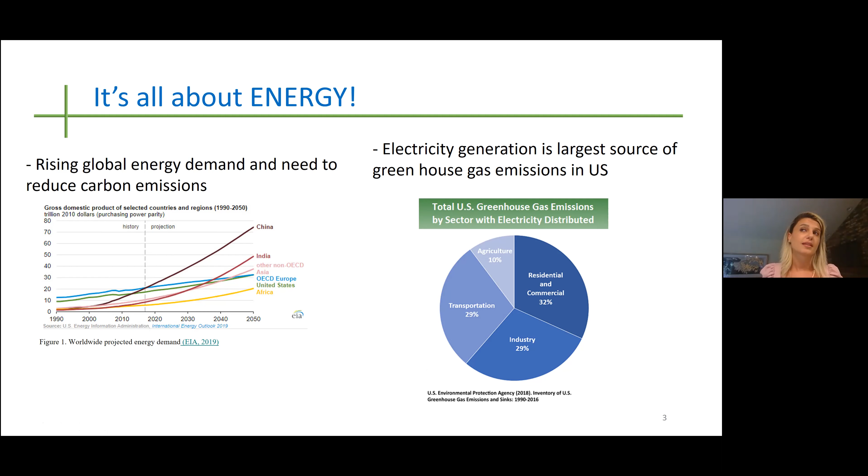If you take a closer look at this figure, residential and commercial buildings are responsible for 32% of the electricity usage in the country. This was taken from the U.S. Environmental Protection Agency, reported in 2018. This number has increased since then; in the updated report it's about 40%.

So because today's topic of interest is geothermal energy, let's take a quick look at what it is. Geothermal energy is the heat derived from within the subsurface of the earth. The energy comes from magma, and because of radioactive processes, it radiates heat, and this heat reaches the outer crust of the earth at some point. This geothermal energy can then be directly used for space heating, domestic hot water applications, and also electricity production.

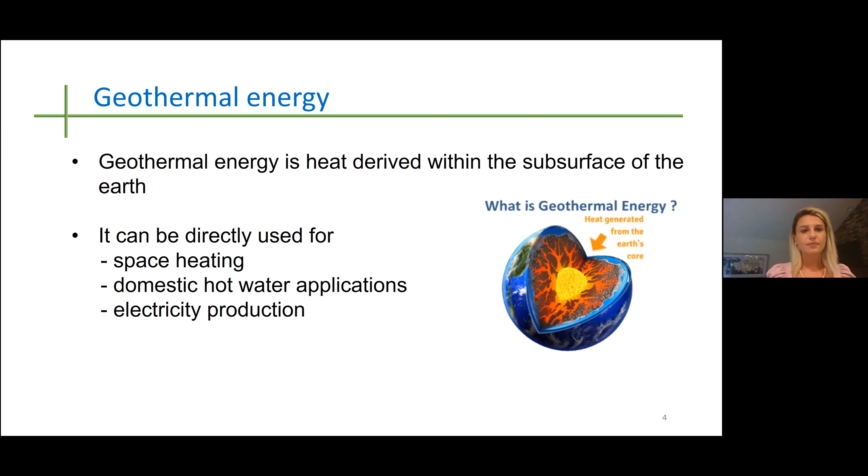So our motivation here is that we could use this subsurface energy for multiple purposes, as I just explained, but how are we going to do that, and why can we do that? If you look at the subsurface temperature contour map of our country, you'll see that the subsurface temperature is relatively constant compared to air temperatures, especially in regions in the Midwest where we experience very cold winters and hot summers, so the ambient air temperature fluctuates a lot.

In contrast, the subsurface temperature after a couple of feet, or maybe 10 or 20, fluctuates very near the surface but stabilizes below that. This is taken from, for example, Atlanta, where you see the annual mean temperature of the subsurface is around 63 Fahrenheit.

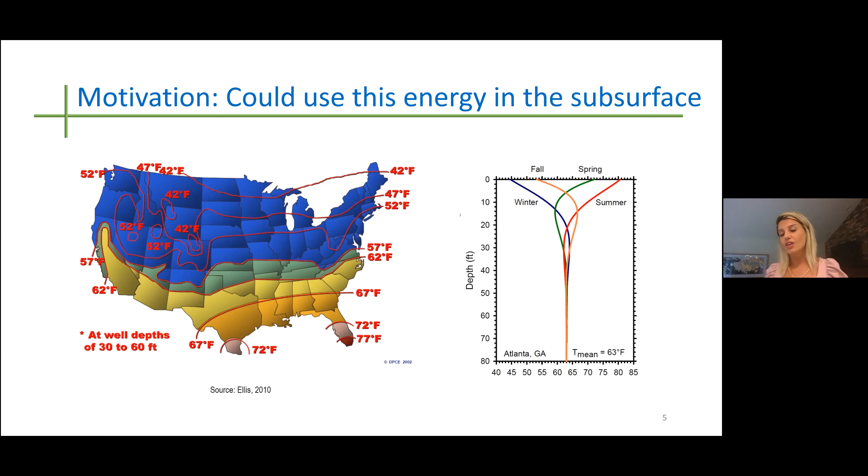For Illinois, after 10 to 15 feet, we see a constant temperature of about 52 degrees Fahrenheit. We can take advantage of this constant heat throughout the year to establish our geothermal systems. Geothermal energy is usually not visible, except when we're talking about geothermal energy power plants, especially those on the West Coast and southern states.

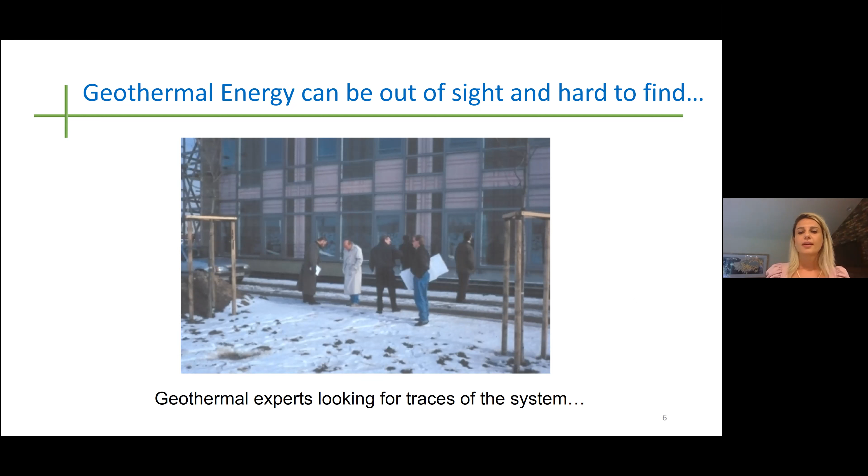But it's usually in the subsurface. We install our subsurface infrastructure so that nothing is visible, but we do have some hardware and plant systems that we install on the surface as well. Depending on the purpose of the usage, there are different types of geothermal systems.

The difference between these two systems: low temperature systems are usually, though not always, used for space heating and cooling or other agricultural solutions. For high temperature geothermal systems, we produce electricity from them.

If we divide them into groups, there's a term maybe you're already familiar with, maybe not - don't worry, I'm going to introduce everything in detail. There are ground source heat pumps, which encompass shallow geothermal systems, and deep direct use applications.

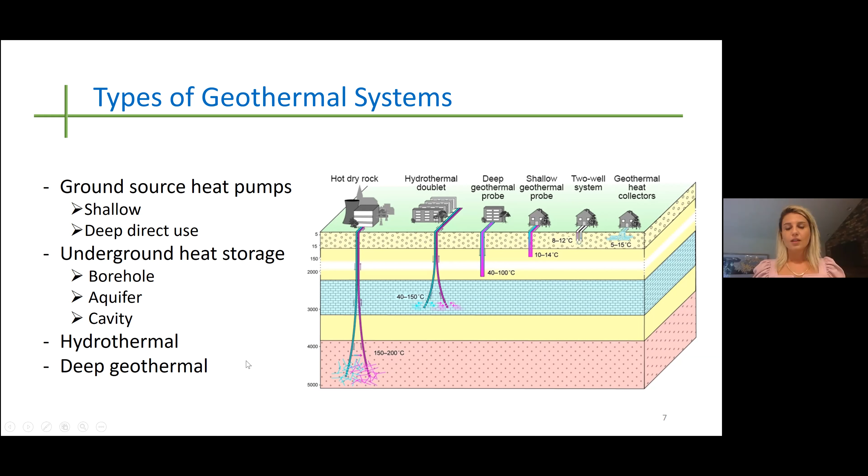Let's take a look at ground source heat pumps. The most common application in the US is closed loop systems. We first started with open loop systems because they were easier to install, but because of groundwater usage restrictions by the EPA in the US, to my knowledge, we are not allowed to install open loop systems anymore.

There are different versions - this can be horizontal, which includes digging trenches in the horizontal direction and installing heat exchanger pipes, usually made of high density polyethylene tubes. There are also vertical systems where we put this heat exchanger tubing in boreholes that we drill, or sometimes we utilize ponds or lakes because of their higher heat retention capacity. So these are all through either trenches, boreholes, or ponds.

Maybe you've already seen the utilization of a pond, or maybe you already have this system in your house - I know Illinois has some single family houses or community scale geothermal ground source heat pump features here.

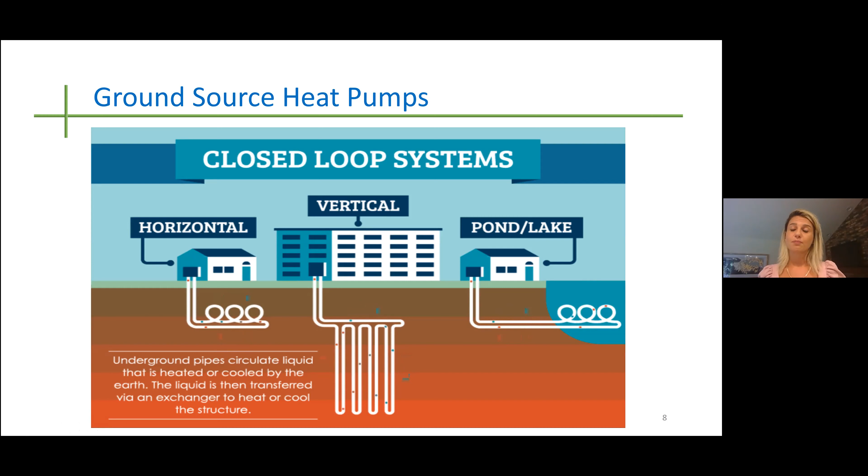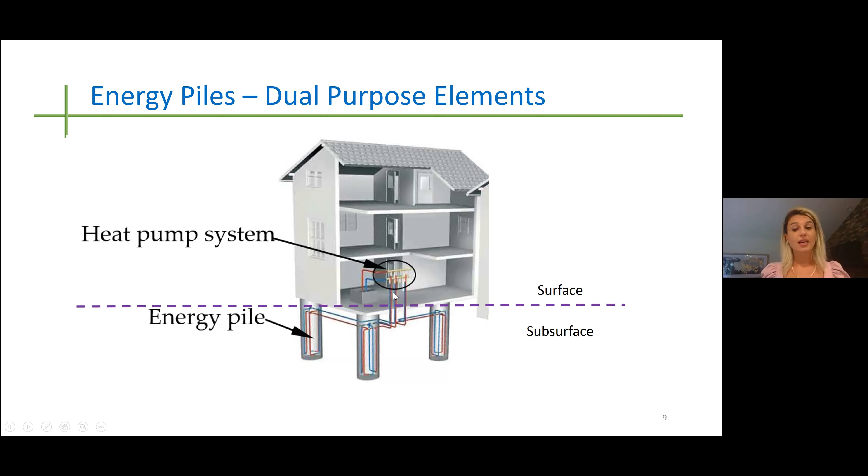This is again a closed loop system - these pipes will be directed to the mechanical room in the building, where they'll be connected to a manifold, a heat pump - water to water coupled heat pump, or water to air coupled heat pump, depending on the type you choose, to provide heating and cooling to buildings. We mentioned there are different heat storage systems; heat storage is just one of the options.

So in the early years, maybe 100, 150 years ago, the tank thermal energy storage system first emerged. This is how we started utilizing the subsurface, because we wanted to insulate these tanks and protect our heat in the subsurface to take advantage of the constant heat of the subsurface.

So there are pit thermal energy storage systems, borehole thermal energy storage systems, and aquifer. In the case of aquifer, we usually use an open loop system. This is where we pump the water up, use it in the building or in the community, and then pump it back to the aquifer.

But again, there are a lot of restrictions with the aquifer thermal energy storage system because we do not want to contaminate our groundwater resources. So there are a lot of permits that we need to obtain before we do this.

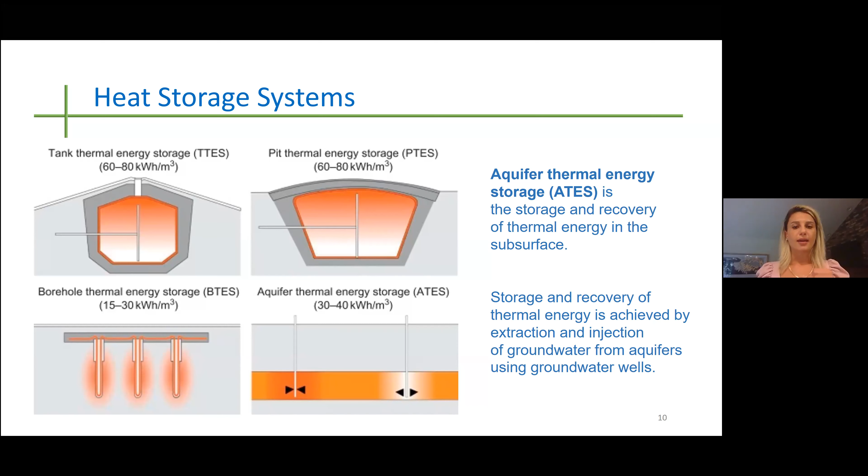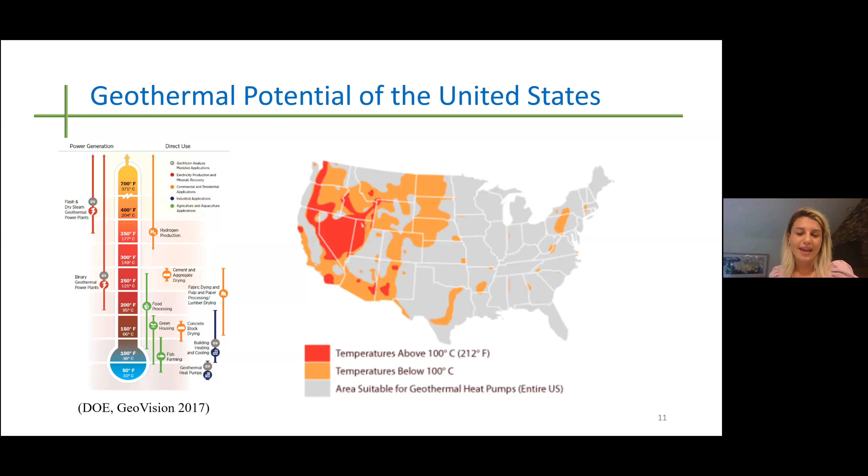After that, we can use this heat for electricity production through either binary geothermal power plants, flash, dry steam, or enhanced geothermal power plants. By looking at this map, you can see that in Illinois, the temperatures are very suitable for geothermal heat pumps. But this doesn't mean that we can only have geothermal heat pumps. There are other solutions that I'm going to talk about in a minute.

So there are factors affecting the design. As geothermal engineers, we design these systems based especially on subsurface properties, and these include soil or rock, or I'm going to call them geomaterial type. Their thermal properties are important and their hydraulic properties are important. Hydraulic properties include hydraulic conductivity and hydraulic gradients, if there's significant groundwater flow detected in the area that you would like to install your geothermal systems.

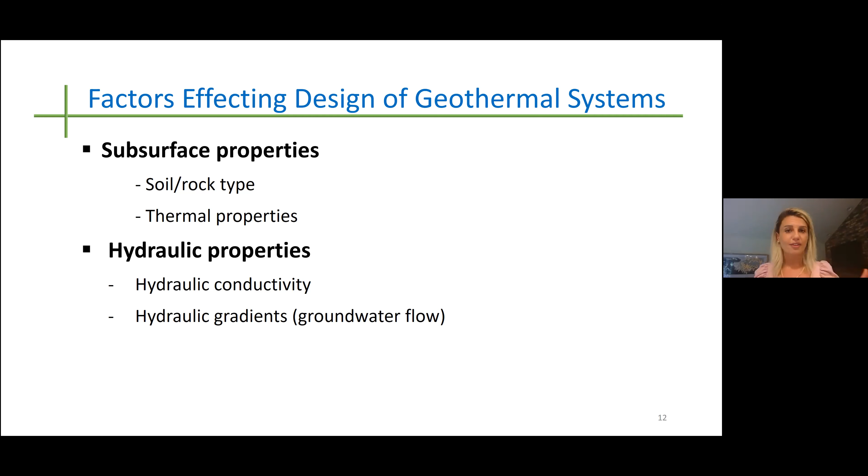As per hydraulic properties, which are very important for us: for example, a higher hydraulic conductivity subsurface provides better efficiency for ground source heat pumps, but not for heat storage systems, because in heat storage systems we would like to retain the heat within a specified volume and do not want heat loss. And higher hydraulic gradients, when there is groundwater flow, again give better efficiency for ground source heat pumps, but are not good for heat storage systems.

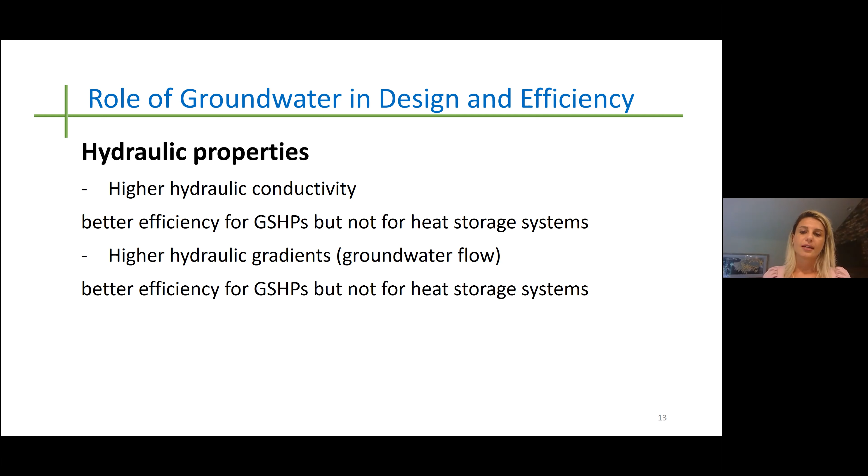So there are many geothermal projects going on campus. The first one that I would like to talk about, my colleague on the call and I have been collaborating on. It's a geothermal system installation for the Campus Instructional Facility, which is a new building on campus. If you've ever been to the campus, this is at Springfield and 4th, if I'm not wrong. It's a new building mainly used for classrooms, for education.

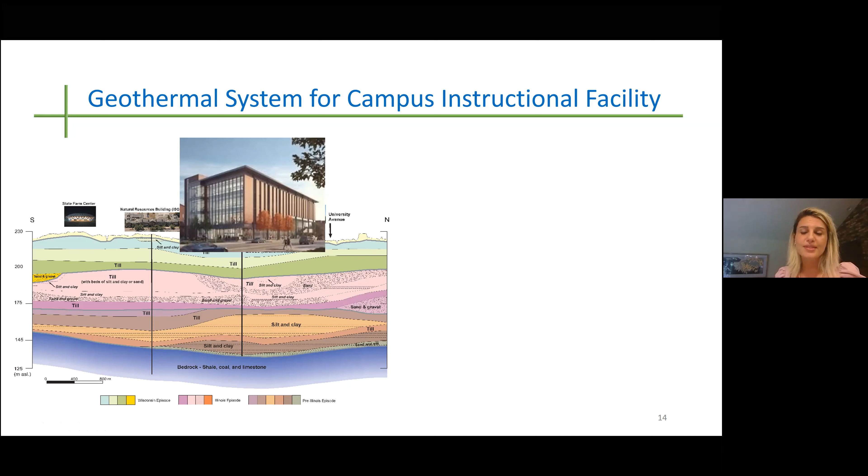What we did here, we drilled a test borehole about 400 feet deep. We collected some geomaterial core samples and brought them into the lab. Then we determined the thermophysical properties of the geomaterials, and we monitored the ground temperatures and also thermal hydraulic properties, which are really important for the design. This system consists of 40 boreholes. The initial plan was 60, and after our investigations, we reduced the number to 40, which actually saved us some money.

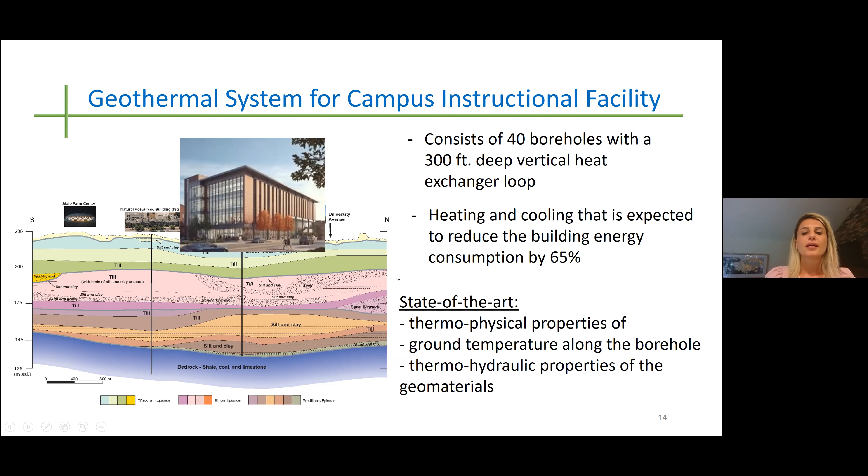The 300 feet deep vertical heat exchanger loops were installed in a loop. This system is expected to provide heating and cooling to the building and reduce the building energy consumption by 65%, which is a very significant number. And this is the state of the art that you're seeing here.

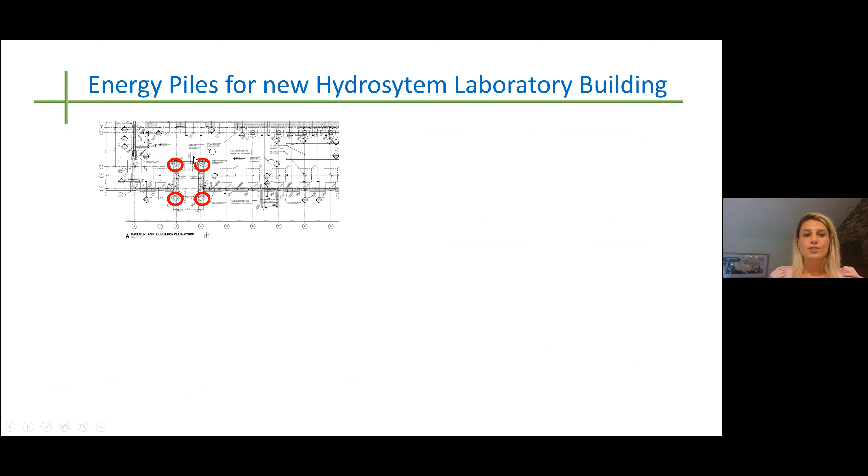It's our major contribution to our campus. Another project my colleagues and I are collaborating on is the energy piles, energy foundations for the new Hydrosystems Laboratory building, which is a new addition to, actually a replacement to, the civil and environmental engineering building. So this was the plan of the foundations. You see 1, 2, 3, 4, 5, 6, 7, 8 foundations, and we decided to utilize 4 of them.

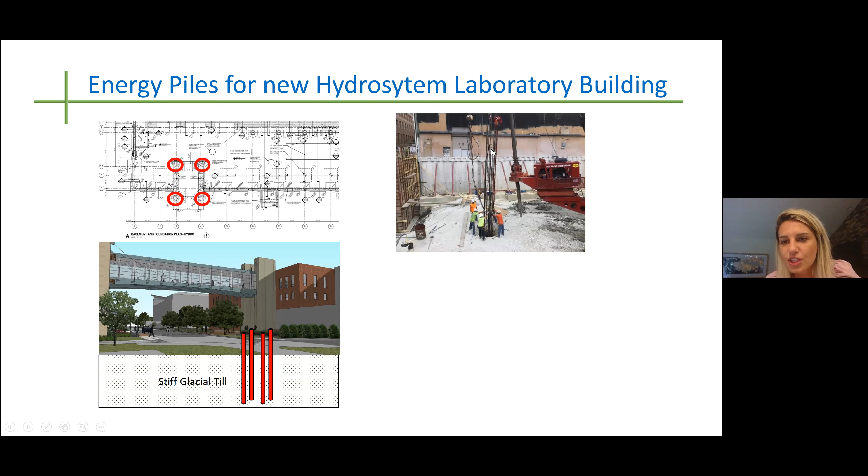And so this new building is connected to the existing Newmark civil engineering building with a very nice smart instrumented bridge. And here are the locations of the foundations. And what we did here, as I mentioned earlier, we simply converted them to be energy foundations. So we put heat exchanger loops, we attached them to the rebar cage. And then we lowered them in the drilled shafts and we instrumented them with temperature fiber optic cables, temperature sensors, and also strain sensors to investigate the long-term effects.

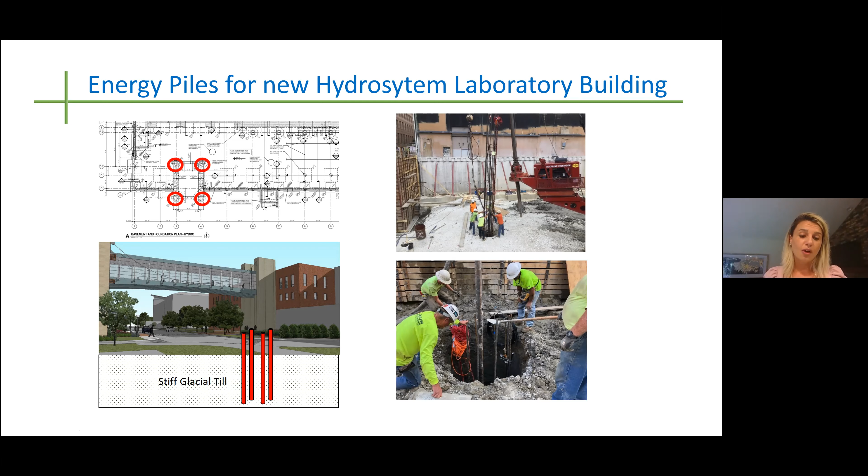And so now this is all installed and the system is not yet operational, but this is both a research project and it is contributing to the heating and cooling of the geotechnical engineering laboratory in this new building.

So another project is for the greenhouse at the research park on campus. So the way that it works, you're planning this greenhouse, and the way to do it is to install horizontal loops, and then just connect them to a heat pump again. So the heat can come from different resources. If this is coming from, for example, another renewable energy resource, that's great. So this system is proven to reduce the energy consumption, energy cost by 60% when compared to the traditional HVAC system.

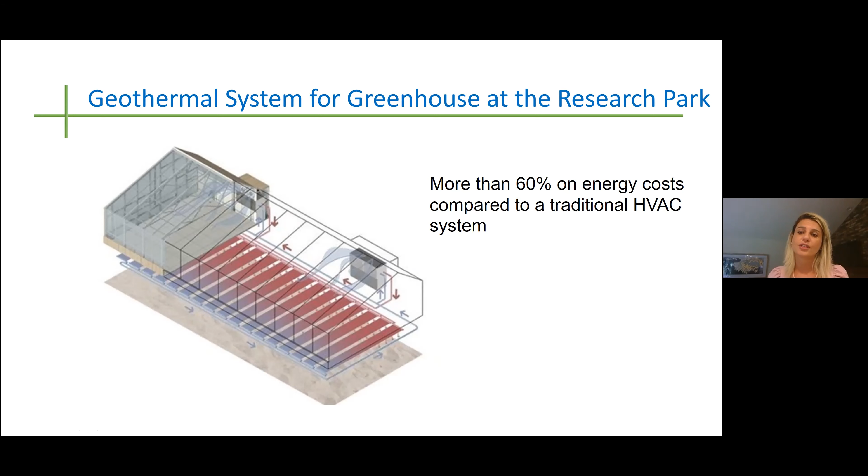The last one that I'm going to talk about is the Repurposing Abandoned Oil and Gas Wells project, which is funded by the Department of Energy. So our motivation here is to provide an alternative to conventional geothermal systems in low temperature areas like Illinois, and to eliminate the capital cost of geothermal systems. So now we're switching gears from shallow systems to the deep systems, where we can generate electricity.

So Illinois, especially Southern Illinois, is very rich in oil and gas wells, especially gas wells. And some of them are not being used at this point because they're mature enough, or they were just abandoned. And geothermal well drilling is the most expensive thing in geothermal system development for electricity. So here, the wells are already drilled, and we are trying to save money.

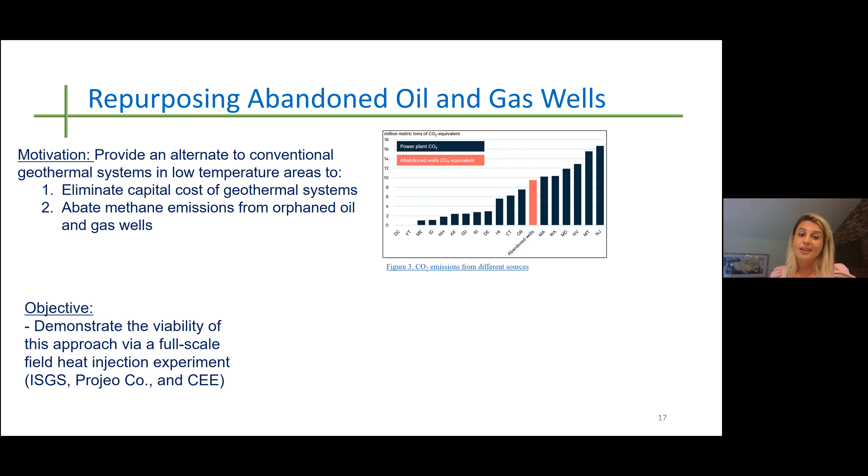And also, these wells are high risk to the environment. So there are a lot of lawsuits going on, especially around Mahomet, to my knowledge, because of the methane contamination of the groundwater. By utilizing these wells, we are aiming to reduce these methane emissions as well. And our objective with this project is to demonstrate the viability of this approach via full-scale field experiments. This is a collaboration between ISGS, Projeo Corporation, and the Department of Civil and Environmental Engineering.

The way to do it is simple. You just need a heat source on the surface. This can be anything. This can be a solar power plant, just to heat water and then inject it through the wells, and heat up a formation which is initially at low temperatures, and then pump it back up to push a turbine on a surface infrastructure to generate electricity. So these are the snapshots of the projects that we've been working on.

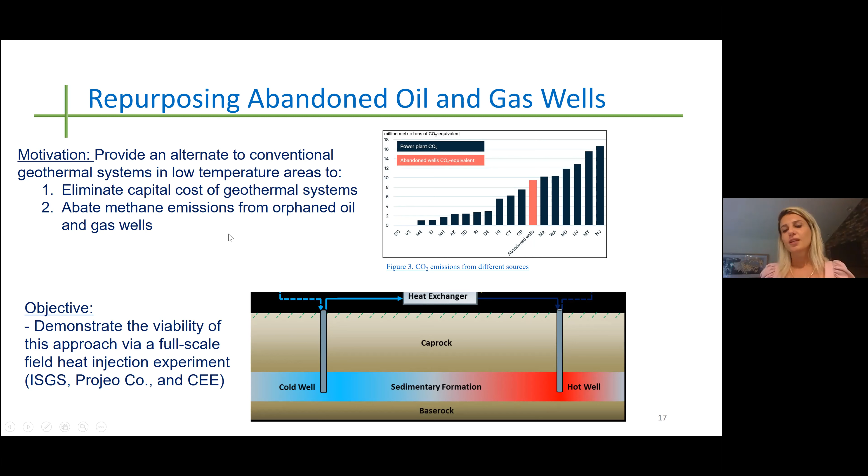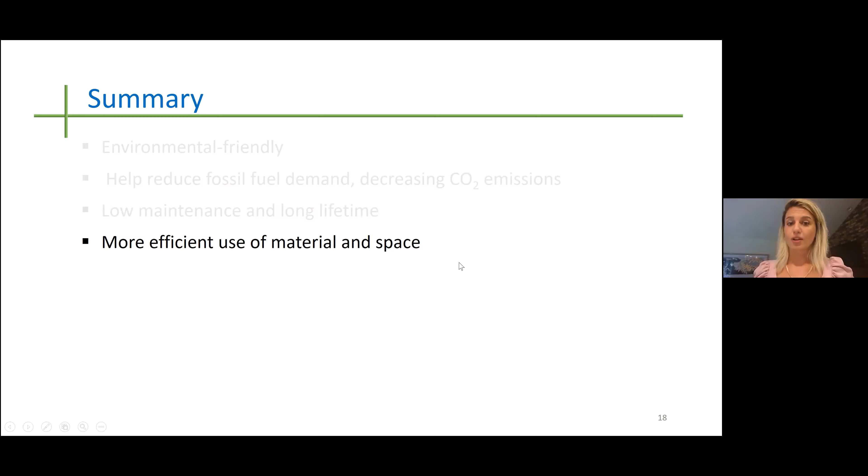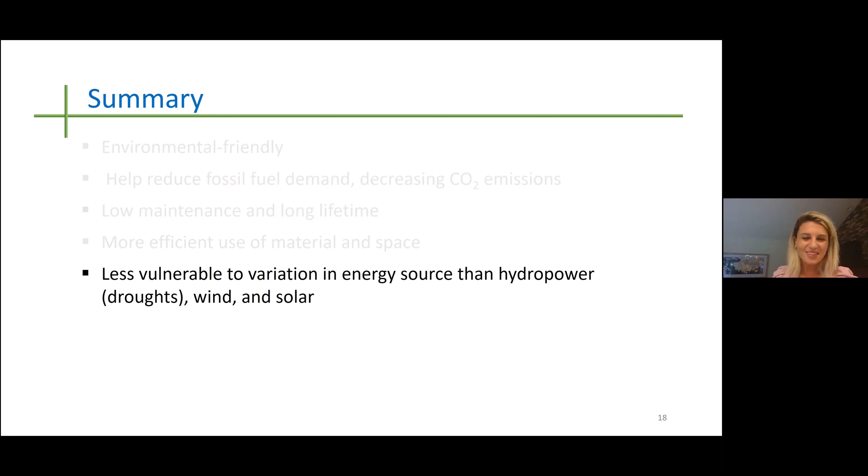And as a summary, geothermal systems are environmentally friendly. They help us reduce the fuel demand and decrease CO2 emissions. They require very low maintenance, and they have a long lifetime. They are space efficient, and they are also less vulnerable to the variations of ambient conditions compared to wind and solar, because it's in the subsurface, and there is a great resource coming from the core of the earth, and so they're less sensitive to energy price fluctuations as well.

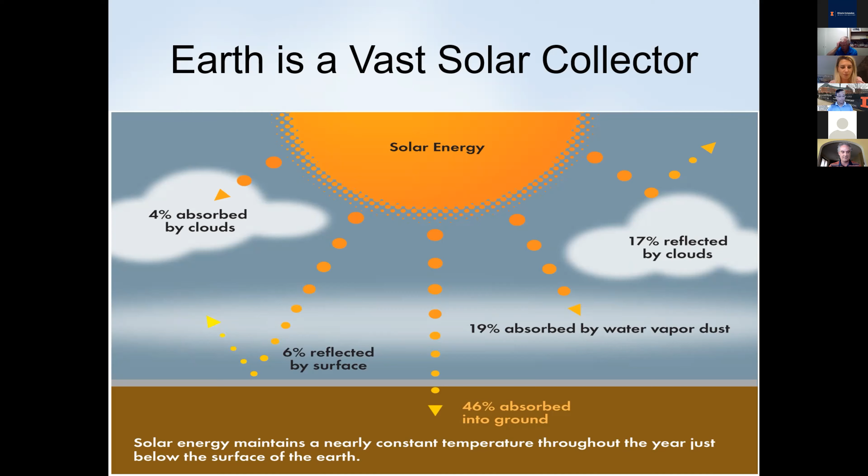So we're in the perfect sweet spot in central Illinois because we rotate back and forth between heating season and cooling season. And we've got a very great heat exchange temperature midpoint at 54 to 55 degrees, which just works perfectly. And so we toggle back and forth between heating and cooling season. And that's why geothermal is suited so well for Illinois, really all of the state, and really most of the Midwest. Go ahead, Nancy.

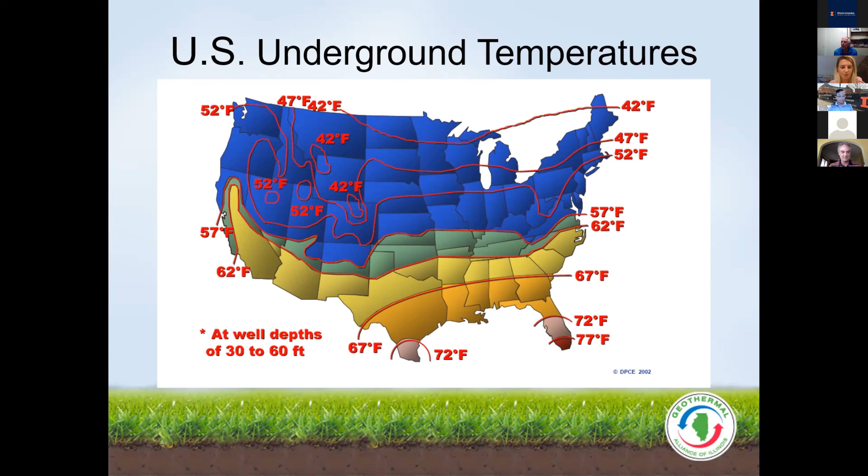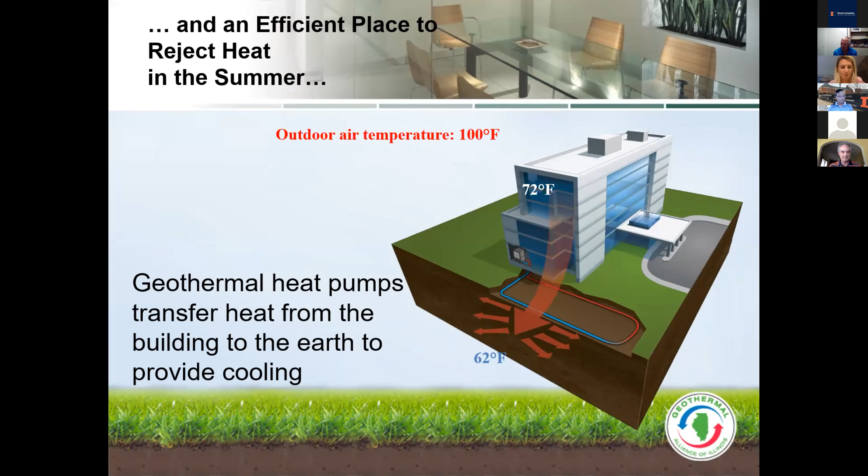So this is a very important slide in terms of the underground temperatures. So we know that the earth is a source of heat in the winter. And it's a place to reject heat in the summer. And when you're in air conditioning mode, we're actually taking heat and injecting it into the earth. And we use geothermal heat pump technology for this.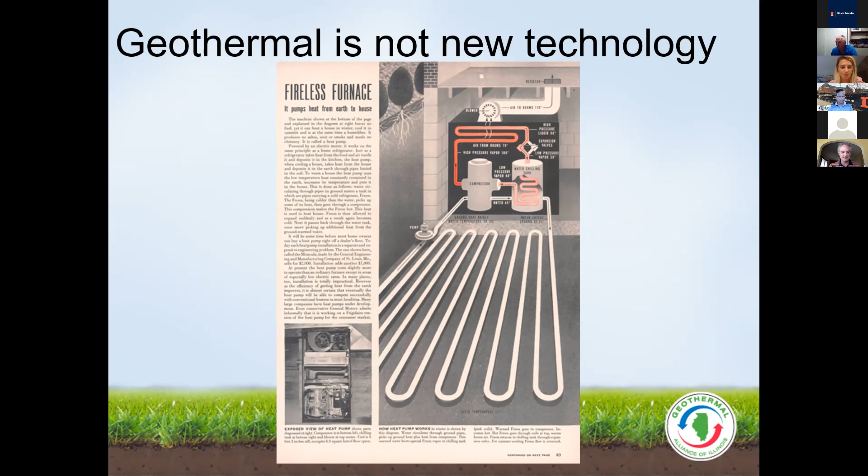And over the years, there have been many advances. Primarily, the early ones through the 70s and 80s and 90s were in outdoor piping, because these early systems used copper and steel piping, which they figured out didn't work in the ground. Today's piping is virtually indestructible and has a 50-year warranty, but for all intents and purposes will last in the ground forever. Go ahead, Nancy.

So geothermal heat pumps are the most efficient and best heating cooling technology available today. That's the word from the US EPA, and they've basically stated this for the last 10 years. We know that it's the greenest heating and cooling technology by far. And we also know that geothermal and solar are a perfect match.

Personally, I've had geothermal in my own home since 1999, so 22 years now. Before that, I worked in an office building that had its first geothermal system installed in 1985. So I've been around geothermal for a long time. I've had solar PV in my home in Springfield almost 8 years now. So I can attest to the fact that solar and geothermal are a perfect match. I like to call them a match made in heaven. They work perfectly together.

So the reason that geothermal heat pumps work so well is that you're not burning fuel to make heat. You're really using electricity to pump water and blow air and take the energy that exists naturally in the ground. Remember, the earth is a giant solar collector, and you're basically using electricity to just move that energy. So again, you're taking heat out of the ground in the winter, bringing it into your home or your business, your office facility, whatever. And in the summer, you're injecting that heat back into the ground.

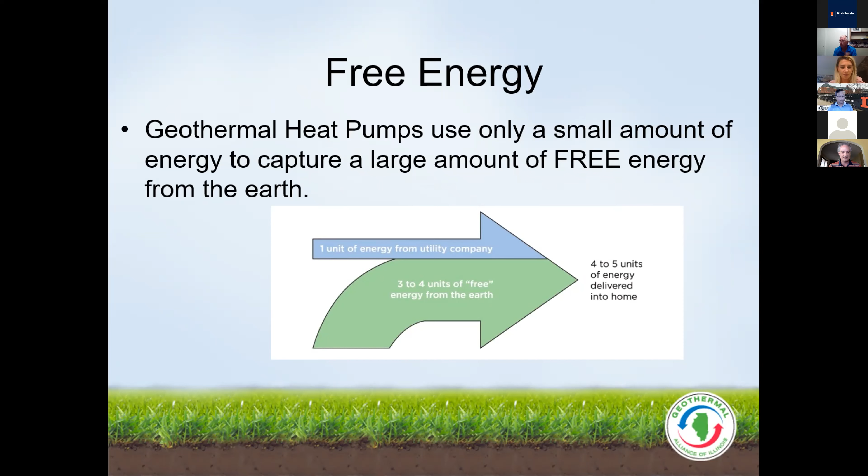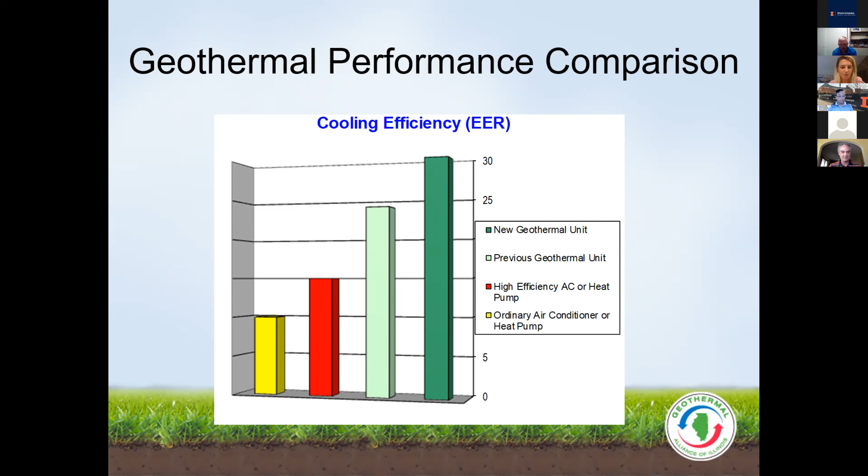So this graph shows the absolute cooling efficiency in EER. And you see the dark bar, that's today's geothermal systems, and you see the cooling efficiency, and it's measured in EER. Most of you are probably familiar with SEER. That's seasonal energy efficiency ratio. Geothermal knows no season because the groundwater temperatures are consistent. So we measure in EER.

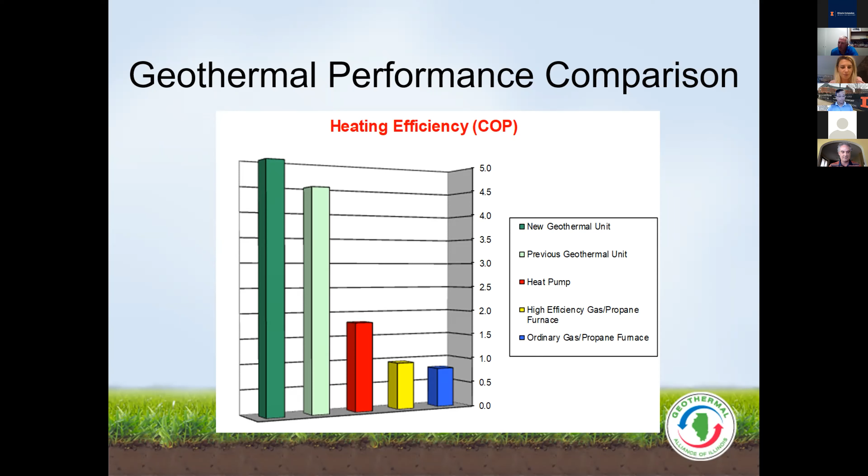And in heating, we measure by COP, coefficient of performance. And this is where geothermal really shines. So you see conventional technology, gas furnaces, in the yellow and blue graph. And this is the laws of physics. And you see the ultra high 500% efficiency new geothermal units in the green bar. And this just demonstrates the high efficiency of geothermal heat pumps. Go ahead, Nancy.

We don't have enough time to really get into the various types of geothermal systems. The previous presenter got into this a little bit, but I will say that probably 85% of the residential installations in our part of the world are vertical closed loop systems. And this schematic shows a little bit of that. So we're going to focus on that.

If you want to learn more about the various loop systems, open and closed, horizontal, vertical, they're all in those geothermal 101s, or I'd be glad to help anybody with any of that information. But because we're real short of time today, we're going to focus on the vertical loop field.

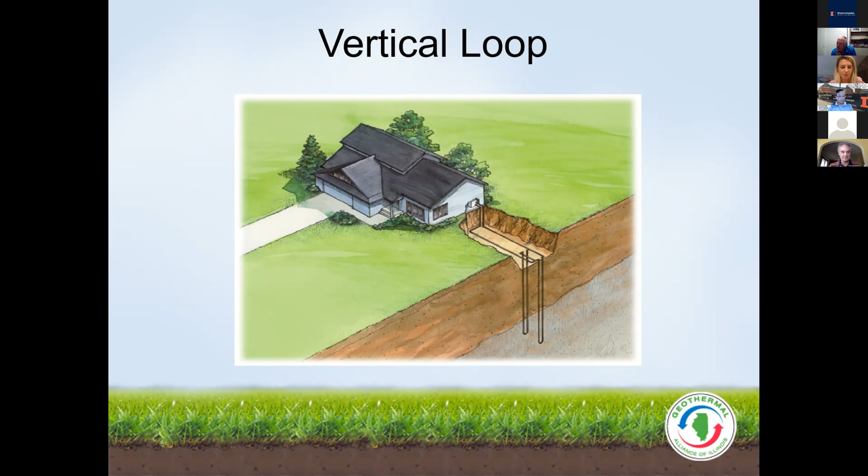Go ahead, Nancy. So this is what a borehole looks like. So this is the fuel tank, if you would, for the geothermal heat pump. This is the borehole that goes into the ground, and typical depths for residential systems are 150 to 300 feet. 150 to 200 foot depths are very, very common for geothermal systems in our part of the world. And I believe they said that the new facility had 40 300 footers on campus. So that would not be uncommon.

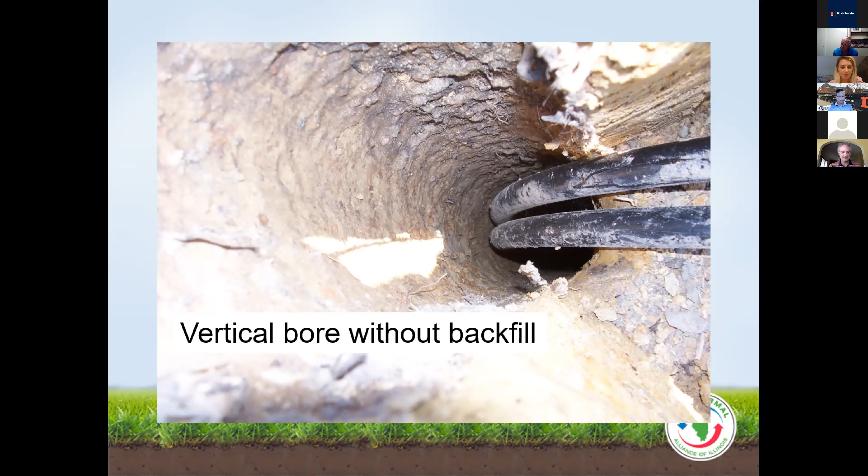So a drill rig that looks very similar to a well drilling rig drills this borehole, and immediately after the borehole is dug, the piping is set into the ground. Next slide. And then immediately after that, that borehole is backfilled with bentonite grout. And so this is actually what that sliver would look like. Go ahead, Nancy.

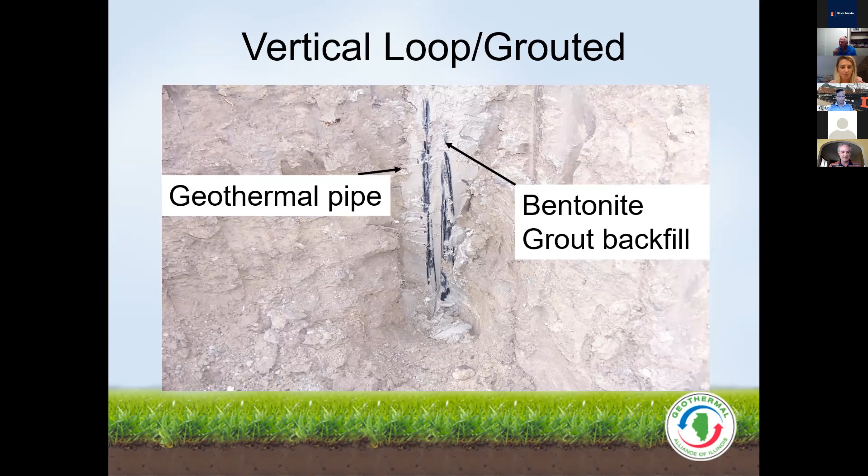So again, we don't have enough time to get into great detail, but in summary, the newest geothermal systems are all 500%, give or take, in that ballpark, 500% efficient. And they do that really through really efficient electronic controls, and they use up to 30% less energy than many of the systems that were installed as recently as 4 to 5 years ago. They tend to be more in the 400% efficiency range. The new equipment, or geothermal equipment in general, provides really even temperatures for the ultimate in comfort. It's perfect for zone systems.

Provides the ultimate in flexibility with some of the new systems that provide 100% of the on-demand hot water. I know my system in my own home provides 100% of my hot water when we're in cooling mode, and approximately 50% of my hot water when I'm in heating mode in the winter. But the new systems can provide 100% all the time, whether you're at heating or cooling. It can just be running just to provide hot water.

And again, they can be used in conjunction with wireless controls. I know I operate my system with my iPhone. Last night I was coming home from Wisconsin, and I got between Bloomington and Springfield and adjusted the temperature in my home so that my house was nice and cool when we got here. So that worked really well. Again, go ahead, Nancy. We're nearly done with my part.

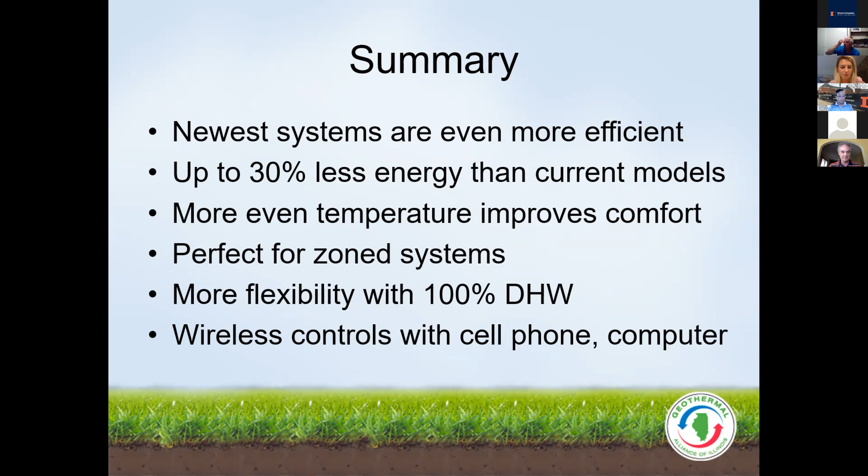We have some great opportunities for schools and municipal buildings in Illinois. Most people don't realize the great number of schools, middle schools, elementary schools, high schools in Illinois that already have geothermal heat pump systems. Again, the mechanical equipment is in a mechanical room, and everything else is underground. So it's out of sight and out of mind, unlike a lot of other renewable energy technologies. So you really don't see it.

But in Central Illinois, Northern Illinois, there are many, many school districts that have been using geothermal for a long time now because they are so efficient in those buildings, and operating costs are typically half or less than conventional systems. Maintenance is almost always much easier and much cheaper. There really isn't a whole lot of maintenance to do. And again, equipment tends to last a long time because there's nothing outside on roofs or on the outside of buildings that is exposed to the elements of weather. So equipment lasts forever, and the loop field that's underground lasts virtually forever. Again, Nancy.

But why are geothermal heat pumps still a niche product in the United States? Well, they cost more to put in, primarily because you have to put that loop field in the ground. So they cost more upfront. The technology really isn't all that well known, especially in areas like northern Illinois. The Chicagoland region does not have a big imprint of geothermal. Over the years, we find that some in the engineering community have given geothermal a bad rap. They don't design geothermal systems, so they don't realize how well they work.

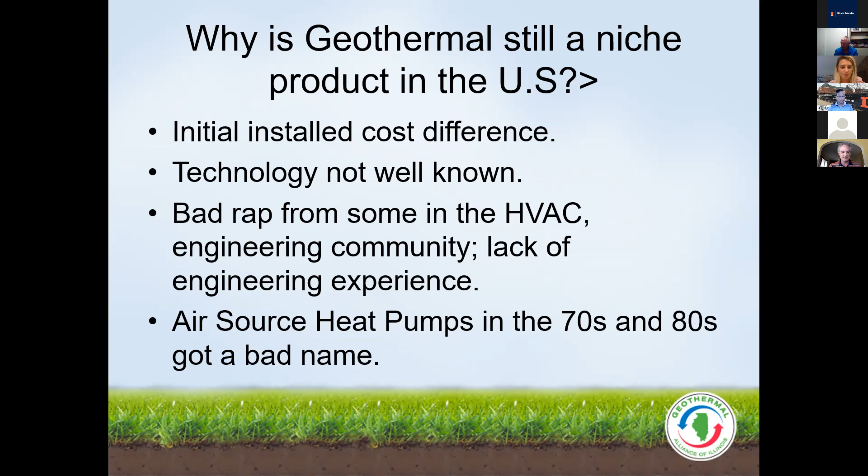So what can a community do to promote geothermal technology? Well, you can incent and promote with local developers. You can promote and provide tax incentives. You can encourage and promote community loop ownership.

Community loop ownership is not a concept that has really taken off well in Illinois, but has become real popular in states like Texas. It's taken off. And when that happens in Illinois, when we see community loops, that will really drive geothermal installations because it provides an economy of scale. A community loop can be thought of as a giant loop field, and then different facilities, homes for instance, can take a sip off of that larger community loop, so you get a real economy of scale that can happen there.

Again, ownership of the community loop by a developer or the community would be a great promotion. Communities that install geothermal in public facilities like the university, City Hall, schools, recreation buildings - those are great examples of facilities that can take advantage of the efficiencies of geothermal and promote it to the public.

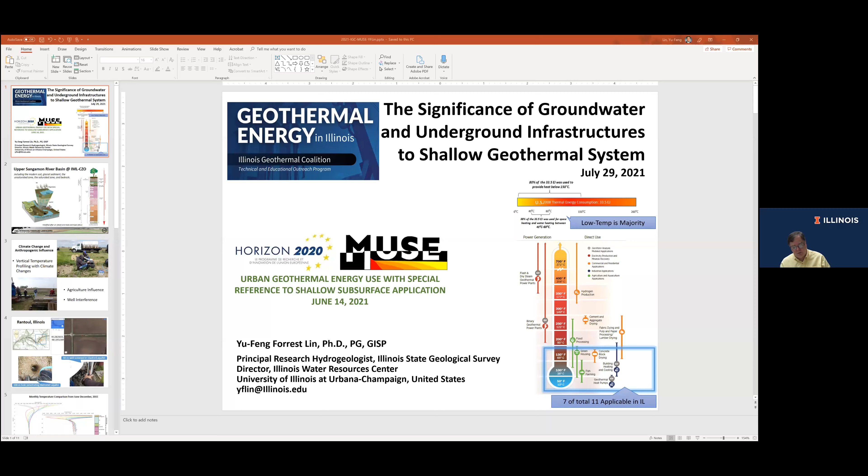So our last presenter today is Yu-Feng Forrest Lin. Dr. Lin is the director of the Illinois Water Resources Center, a principal research hydrogeologist with Prairie Research Institute, a clinical professor in the Department of Civil and Environmental Engineering, and research professor in the Department of Natural Resources and Environmental Sciences, all at the U of I in Champaign-Urbana. So I didn't know which one of them to cut out - he's involved in a lot of different things. Received his PhD in geological engineering from the University of Wisconsin-Madison. And he's going to highlight some of the things going on significant to groundwater and groundwater infrastructure pieces. So I will turn it over to you, Dr. Lin.

Thank you very much, Jay. And can you hear me, my audio and video okay? You look good, look and sound good. Yeah, things are looking and sounding good.

Okay, so well first, thank you for inviting me, and it's really great to see so many colleagues and potential friends interested in this technology. I really want to thank Jay and Nancy for hosting this event. I'm grateful to be able to elaborate a little bit more on what Professor Baser and also President Freitag presented earlier with all of their insights.

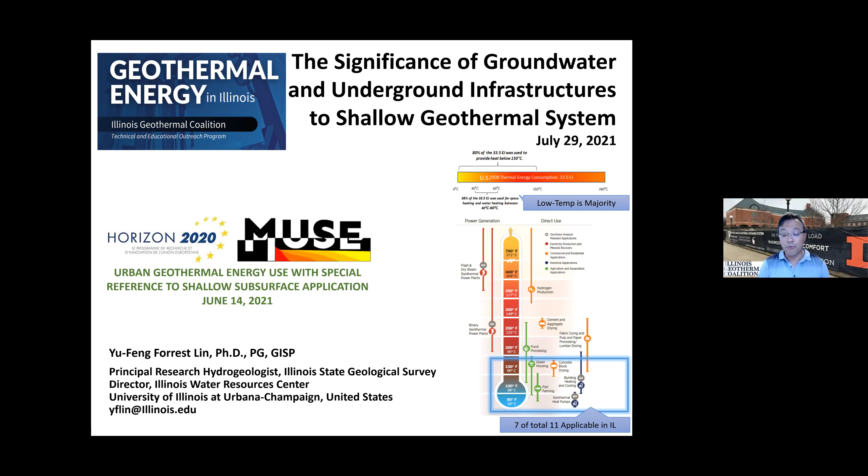So just some numbers to give everybody an image about why we are talking about this here in the Midwest, in Illinois, and why this is good for your city, your farm, your house, or even your backyard.

So I'm a hydrogeologist. How did I start getting into all of this? Because I got involved with one of the NSF projects, National Science Foundation project.

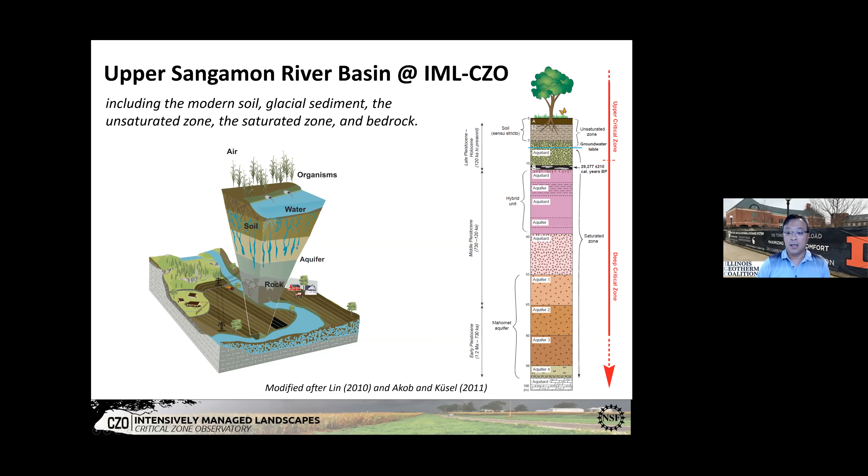It's called the Intensively Managed Landscape Critical Zone Observatory. In this project, we try to understand the critical zone, which is beneath the canopy and above the groundwater system. As NSF defined, more than 95% of the biological activity is in this zone.

During our study, I was in charge of trying to understand how climate change and human activity impact the subsurface temperature regime. The impact of that shows us a picture about how temperature propagates because of climate change, and how agriculture activity interacts with subsurface temperature.

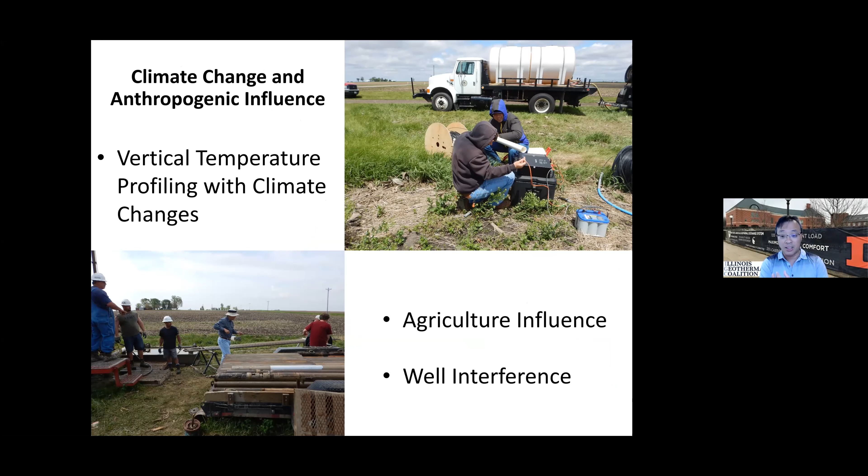And also, when we install a well and put a plastic pipe in there, what's the interference of that? So we had a site at Rantoul, Illinois, and it just happened that when we installed it, Google Earth took a picture from their satellite.

Our truck, our installation truck, was all there. In this project, we installed 2 wells.

One is a borehole 100 meters deep, and we put fiber optics down there to measure temperature. The other one, just about 2 meters away, about 5 to 6 feet away, is another well, 40 meters deep, screened down to the Glasford aquifer. The borehole goes all the way to the Mahomet aquifer.

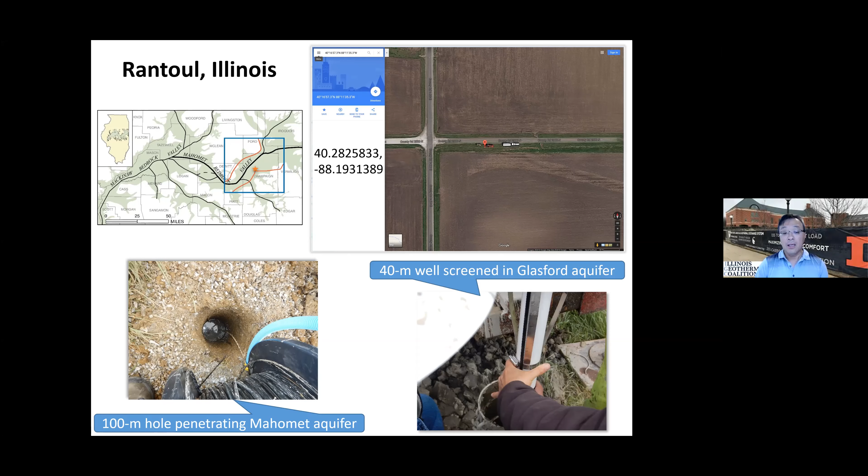During this study, in our deep borehole, which is 100 meters and goes all the way to the Mahomet aquifer, in the shallow part, the top 16 meters, the data we collected over a year, monthly, corresponds to the conventional study very well. The temperature fluctuates near the surface and becomes almost constant when it reaches 15 to 16 meters depth.

This diagram looks very similar to what Professor Baser showed in her presentation. However, the scale of the temperature resolution there is about 1 degree Celsius. Our instrument, using fiber optics, can measure all the way down to 0.01 degree resolution.

When we use this high resolution, even at just 0.2 degree resolution, the temperature is not constant. If you use a magnified lens to look at the temperature, very interestingly, the temperature gradient change follows along the geological formation, especially the slope changing dramatically when it reaches the Mahomet aquifer.

This gives an indication of how significant groundwater is to the thermal regime in the subsurface. That's how we started all of this, understanding how important groundwater is to the subsurface and even for geothermal energy design and study.

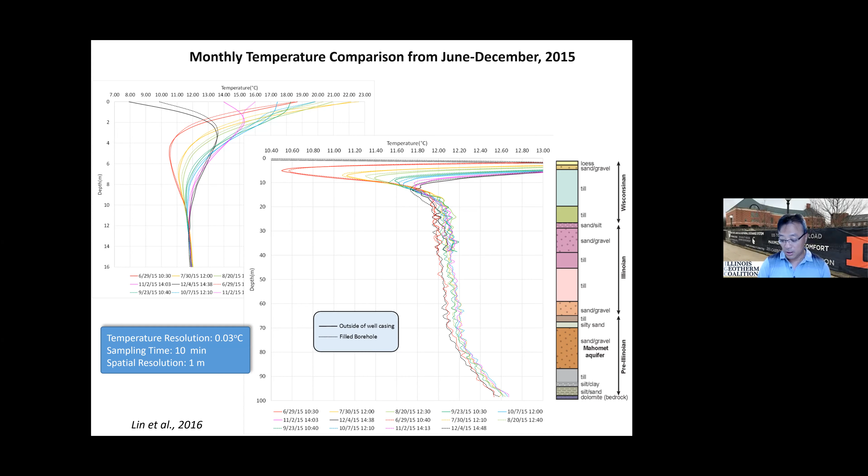One well might not make a big difference, but what if our infrastructure in the subsurface, for example in the city, includes the water supply system, sewage pipes, steam tunnels, or even a subway system? How is that going to change the subsurface temperature profiling?

And also in our rural areas, when we have, let's say, a remediation well field with 30, 20 wells, how is that going to change the whole regime of it?

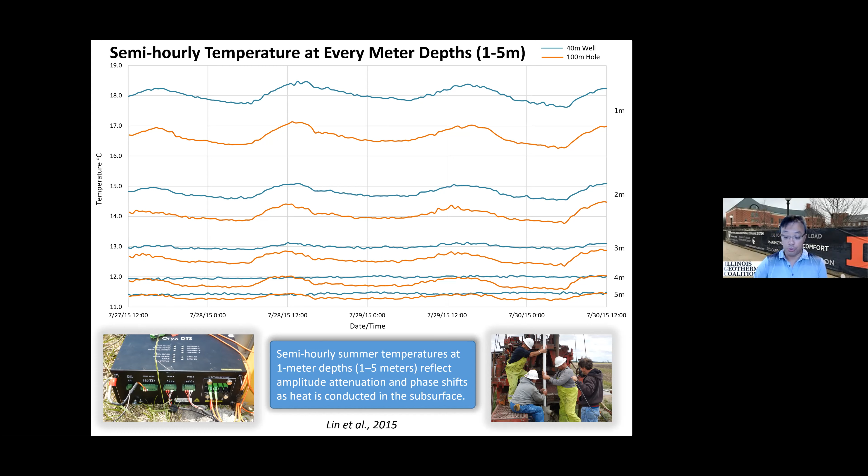So the initial study shows us using rule of thumb to try to understand the subsurface temperature. It's not really this way, it is this way. We need to have much more detailed study, especially when President Freitag talked about installation cost for geothermal being high.

Once we understand the subsurface better, I think we will have a very good chance to reduce our initial installation cost. So that's why at the University of Illinois we established a geothermal research station on our campus. We mimic the vertical loop, as John mentioned earlier, but we also put in instruments to measure how this loop will behave in very detailed spatial and temperature resolution.

So inside the loop, when we do the simulation, it's very similar to how an actual heat pump works. And the simulation is not a computer simulation, this is real data. We inject water and mimic how the ground source heat pump works.

Inside the loop, this is where the water comes in, and this is where water comes out, because it's a U loop. The bottom of the U loop is in the middle of it, so we can take half of that U loop. Inside the loop, the temperature is linear, but outside of the loop, the temperature change over time corresponds to the geological formation perfectly.

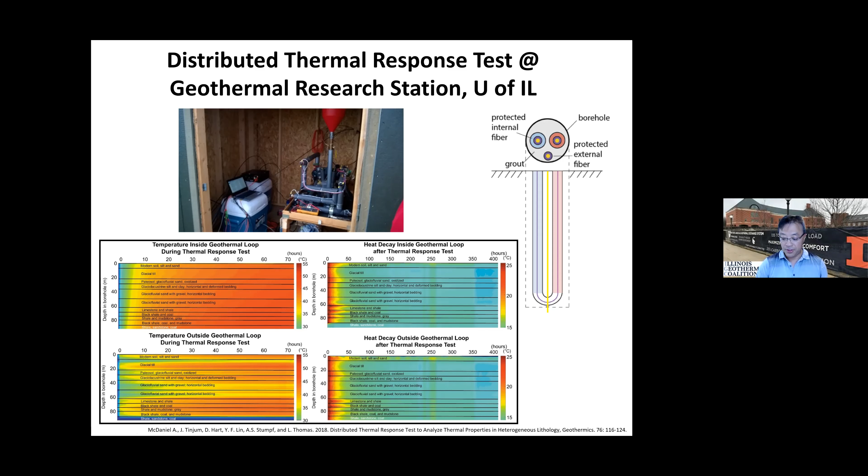Even when the loop is cooling down and we stop the water circulation, the cool-down curve inside the loop and outside the loop all correspond to the geological formation perfectly, especially when you hit an aquifer system. The response is even more obvious than in dry formations.

So we use this kind of study to help our own geothermal system installation. As Professor Besser mentioned earlier, on this campus project we just finished, the original design was 60 loops. Because of our study at really fine resolution, which improved the design process, we cut down from 60 loops all the way to 40 loops.

What does that mean? It means we can pinpoint efficiency for the exchange in the subsurface much better than just using rule of thumb. It also means financial benefit — the original design had a payback of 40 years, but now we only need 28 years to cover this cost through operation.

During our study, we also found this subsurface temperature regime was not quite like what we had expected earlier. When we hit about 10 meters depth, the temperature suddenly spiked, and we were wondering what was going on there. This is very different from what we expected.

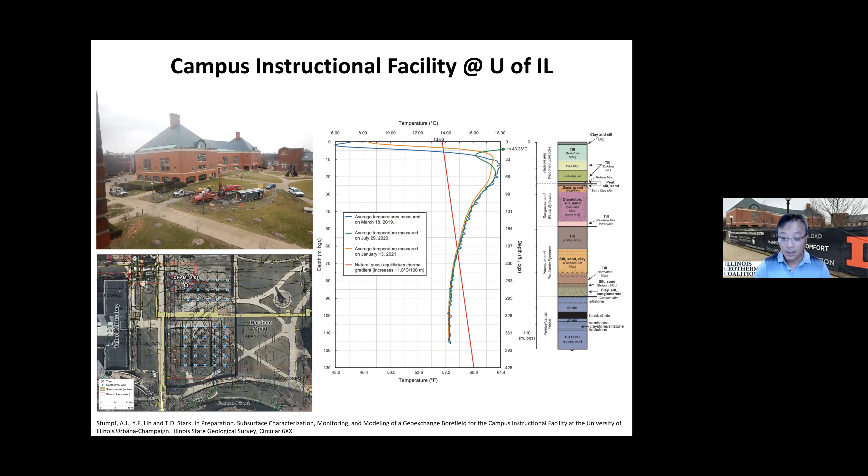Then we realized, oh, 10-meter depth is where the university steam system is. That steam system really shows a big temperature spike no matter what season we're in. So from all of this data, what I want to show you briefly is how important it is to understand the subsurface, the properties of the geological formation, and also the groundwater system.

We need to understand the flow, the content, and also not forget about our artificial infrastructure, which could be an anomaly for subsurface temperature changes, but could also be a potential for us to harvest some of that heat. That's why I don't want to call this a conclusion — it's a summary to show you the scientific evidence that we are doing geothermal exchange.

The equipment for the heat exchanger has improved so much, thanks to our mechanical engineers. But again, we are using the subsurface as the exchange medium for our benefit in heating or cooling. The subsurface is key for us to improve this technology and cut down our costs.

That's why myself and a lot of our colleagues are working together very hard trying to improve this great technology. Look at what John showed — 500 percent better. This is even more improvement just from geothermal compared to the conventional way, even more than LED compared to conventional light bulbs. And this LED of energy is not done yet.

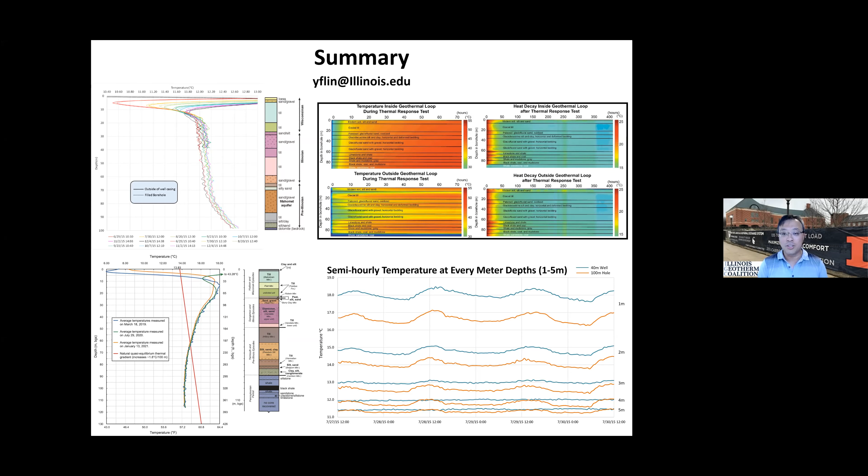And we are doing much more study, trying to make it better. And so we are really in the leading edge for such technology improvement and scientific study. So even now we are working with scientists around the world, from Europe, from Asia, and we are publishing all of the advanced papers in the top journals of our field on this. So this is a quick update for everybody about the scientific evidence, the current progress and our future

plan of this. So I'm happy to answer any questions along with my colleagues, John and Tugce, after my presentation. And I think this is the last slide of my presentation. Thank you very much for your attention.

Thank you, Dr. Lin. Thank you to all of our presenters. At this point, we do have a few questions. There was one kind of detailed question about cost that James Ryan Hamilton asked, and John responded back in the chat about it. John, do you want to make any more comments about that relative to budgeting? How much would you budget if you're replacing a system?

Sure. So as I told Jay in the chat, I hate to throw out generalities because different parts of the state have different costs. Drilling and loop installation tends to cost more in northern Illinois than it does in central Illinois. Drilling can be a little tougher there. Drilling in central Illinois is pretty cookie cutter in most of our areas. We have pretty simple clay soils that are easy to drill through. I know in Springfield, it's very, very cookie cutter. And when you run into different types of soils, it can be a little more complicated.

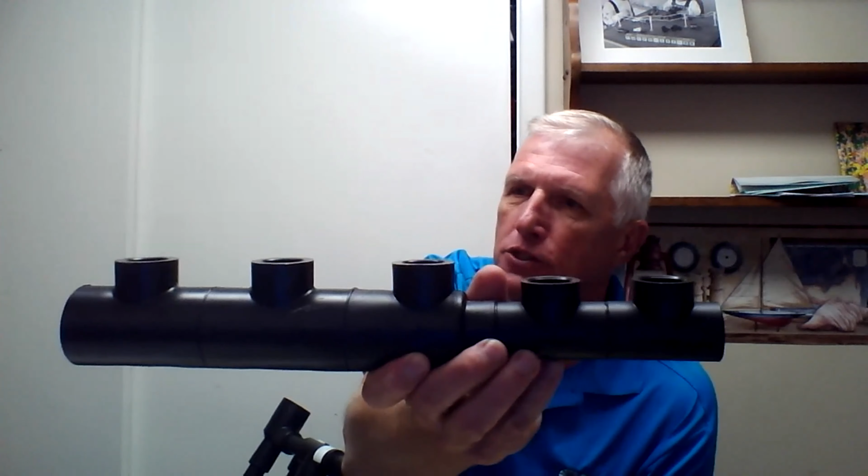I was just getting up. That's a piece of piping. That's actually a 5-ton header for a residential system. That's how the piping's connected before it comes into the home.

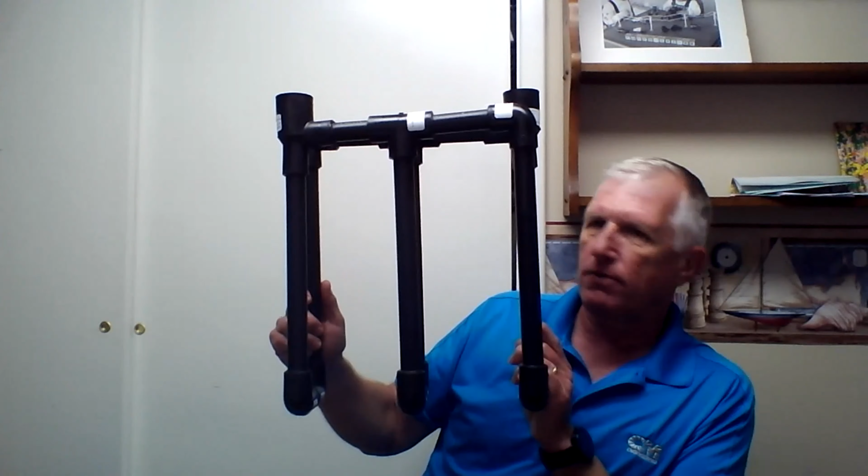But if you can see this, that's actually what the pipe looks like. And so this is essentially what my loop field is out in my front yard, 20 or 30 feet from me. This is a 3-ton loop field. And if you think of this as being 175 feet in depth, that's what my loop field is. I have 3 loops just like this in my front yard that are 175 feet in depth. And then that is connected via here with 2 pipes that run into my house.

Pretty simple. Now, the piping is guaranteed in the ground. This is HDPE pipe for 50 years. I say it will last forever. Frankly, there's 2 enemies of a loop field, whether horizontal or vertical. Number 1 is a backhoe. You go digging and you cut into a loop field with a backhoe, you will damage it. That makes for a very bad day. It doesn't happen very often, but it could happen.

That's number 1. Number 2, and this is hypothetical, I think the other big enemy is an earthquake. If we ever have the absolutely terrible, massive earthquake in southern Illinois, central Illinois, that could damage loop fields, but I think we've probably got bigger fish to fry if we get to that point, because the buildings that are served by that vertical loop field have probably been destroyed.

Right. Hopefully that helps. If I may elaborate a little bit on what John says here, if you see John's pipe under his arm right now, the bottom of that U-loop, regulations require that to be fused. It's not like your regular water pipe, where you use glue. It's fused with very special equipment, just like the original pipe, and that's why it won't leak. It's not like plumbers using glue that turns purple.